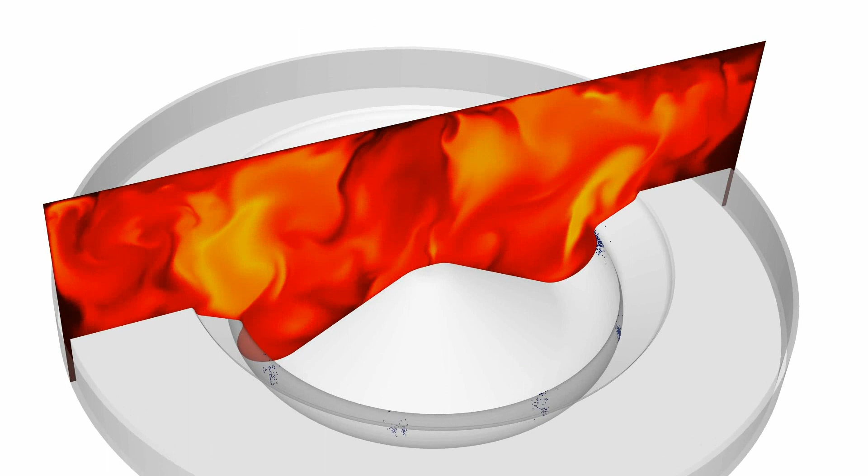The meshing capabilities of CONVERGE, which creates a mesh at runtime from a surface file, is particularly advantageous for optimization problems where the geometry is changing through optimization parameters. Recently, CONVERGE version 3.0 was released with significant enhancements over previous versions. Version 3 has cell-based load balancing and reduced RAM requirements to provide better capability on HPC clusters. The new version is more highly scalable, can better leverage fast interconnects, and can complete simulations with faster turnaround.

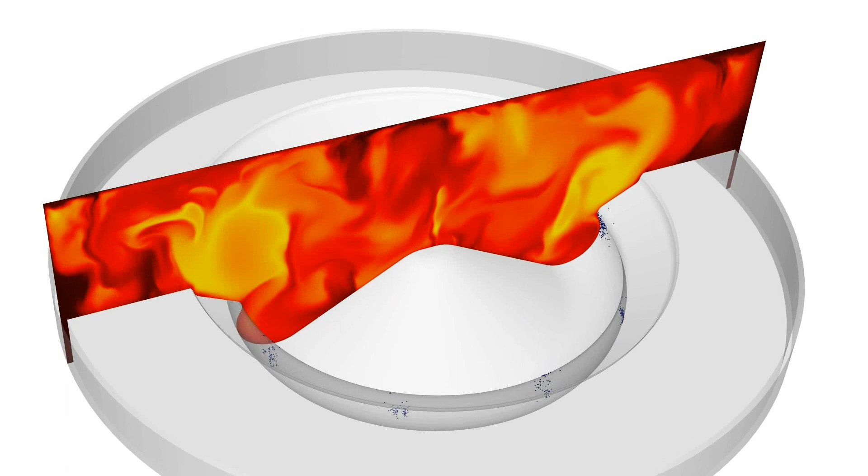is reduced significantly. For the single-cylinder high-speed diesel engine case, we were able to run 16.5 engine cycles in one day, and for the spark-ignited PFI engine case, we were able to run 12.5 engine cycles in one day. Both these cases are run on an HPC cluster with a fast InfiniBand interconnect. These engine cases were not tweaked to make the parallel results look good. These are real results for best practice engine setups.

These kind of turnaround times open the door to engine research applications that were prohibitively expensive in the past, such as knock or cycle-to-cycle variation, which require the simulation of many engine cycles, or optimization, which requires typically 1,000 or more engine simulations to identify a global optimum.

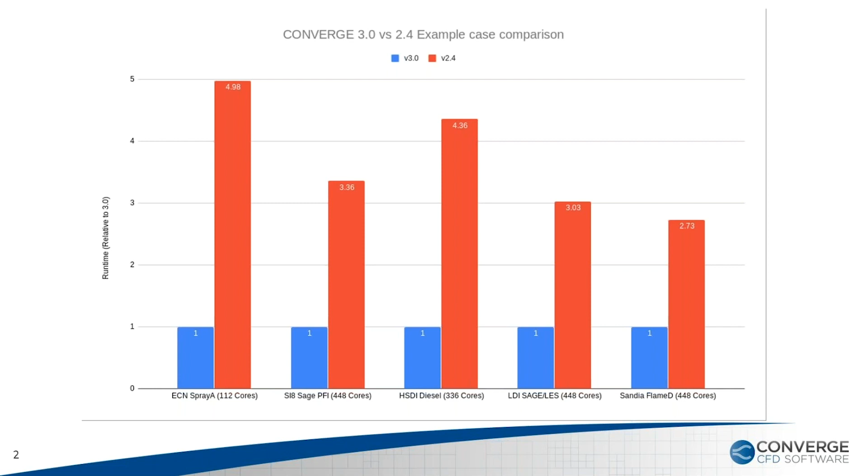Today's webinar will review recent work with geometry optimization with CONVERGE involving two partnerships with Friendship Systems and their CAESES software package and Aramco Research.

Thank you for this introduction, Dan. This is Mattia Brenner from Friendship Systems in Germany. And I would like to talk a little bit about our tool CAESES and how it can be used specifically for powertrain applications in connection with CONVERGE's CFD tools.

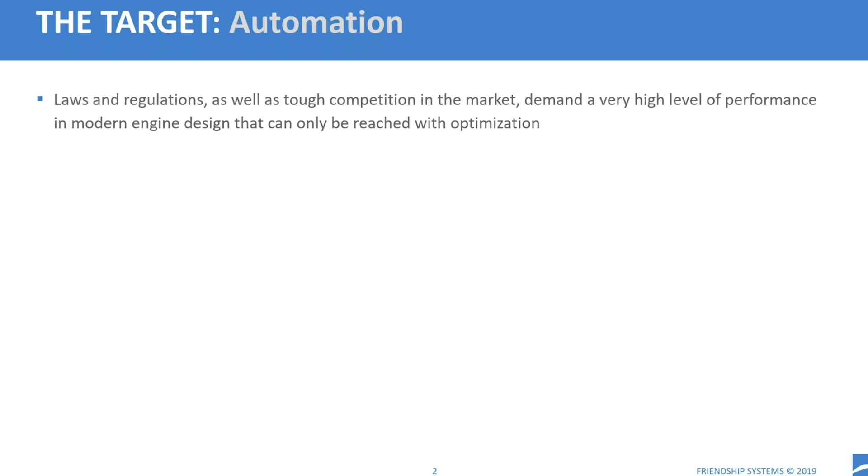So let me start by giving a little bit of context. So the target of what we want to achieve is automation, and the reason for this is that due to laws and regulation and competition in the market, the expectation for the performance of modern engines is very high, and typically this is not easy to attain with, let's say, traditional iterative manual processes, but these targets can only be reached with optimization. And these kind of automated processes, which are optimization or automated design exploration, they typically lead to better and optimized designs. They can, of course, reduce the development times or reduce the design cycles.

And also, which is a very important point in my view, they also increase the knowledge about how the product behaves very early in the design process. So it gives an understanding of how the product reacts to changes in different parameters and creates a basis for decision making later on in the process.

So if we want to run these kind of automated processes involving CFD, we need to involve several tools to run that. And first of all, we need a simulation tool that can provide the performance information that we would like to evaluate. This is done very nicely by CONVERGE. And we need a driver of the optimization process, so a tool that supplies all the algorithms and strategies that we need to run the different design parameter studies and explorations.

But also a large amount of data is created throughout that process, so the tool needs to manage all this data that we generate and also allow for some post-processing where we look into the actual data that we created and are able to make design decisions. And finally, the third component that is needed in this process is a suitable CAD tool that can produce all the different geometry variants that we want to analyze throughout this process. And basically the last 2 points are what we are trying to address with our tool CAESES.

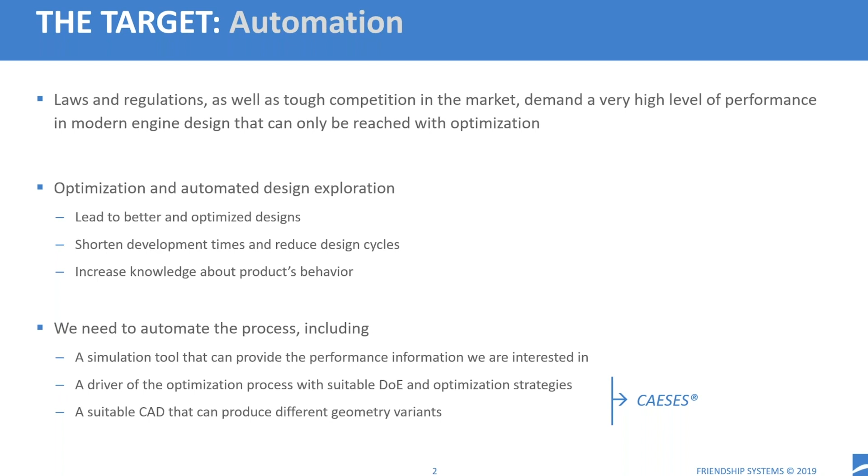So as you just heard, one part of CAESES is a CAD tool. So you might ask yourself the question, why would I need another CAD system? Typically every company already has some kind of CAD system in operation. And in our experience, the typical bottlenecks that people encounter when they're trying to set up and run such a design exploration or optimization process are actually related to how the geometry is handled and how the variation of this geometry is handled.

Traditional CAD systems, while they might be very powerful for many different things, often don't have a strong point on geometry variation. When you're trying to automatically create geometry variants, change geometry parameters in an automated fashion, this is often prone to failures, so the geometry might break down, cannot be regenerated, or might need some manual work. So that's of course a significant problem.

Another important point are constraints. Typically when we're trying to optimize the geometry, we have certain constraints to take into account due to manufacturing or packaging, for example. And that's also a point that's often not so easy to consider with traditional CAD systems throughout the optimization, to make sure that the optimized geometry that we get in the end fulfills these constraints.

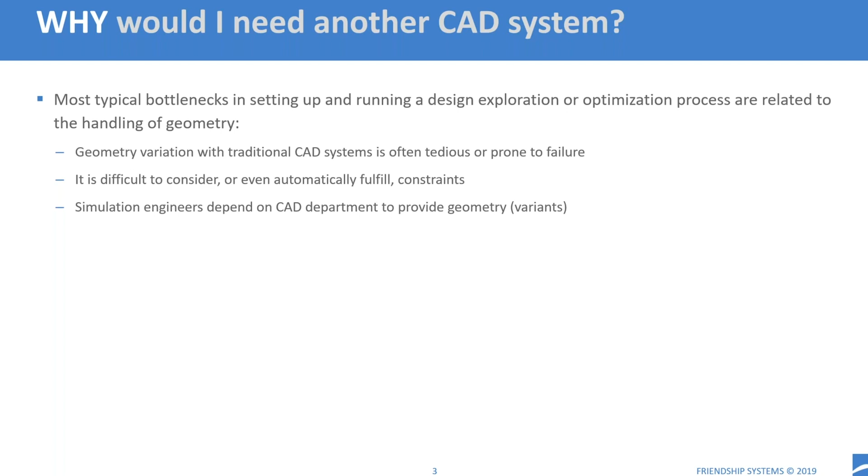Also, a bottleneck that is encountered, depending on the situation in the company, is that there is a division of labor between the simulation engineers and the CAD department, and the simulation engineers are typically dependent on the CAD department to provide the geometry models and to create geometry variants due to some change requests. And of course, that's not very suitable for automation.

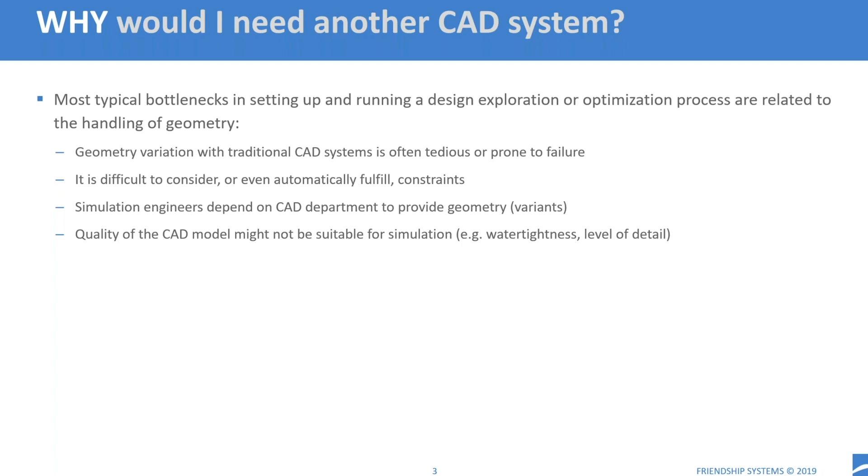And finally, last point, the quality of the CAD model might not be directly suitable for simulation, so it cannot be transferred to the simulation system or the meshing directly as it is. There might be some issues with water tightness or even the level of detail that we have in the model. And these are the kind of things that we're trying to address with our CAD functionality within CAESES.

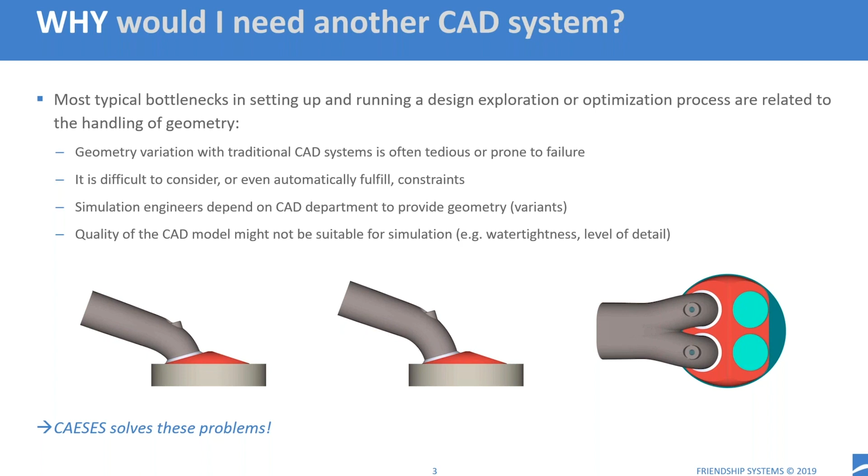So if we look a bit more closely at what we do: the strongest part of CAESES is the specialized CAD tool, which allows you to build up smart parametric models of the geometry, efficient parametric models that allow a lot of variation, a lot of flexibility, but without having too many parameters, because the more parameters we have, the more the effort for the optimization scales. And it is also very robust to run these variations.

The second component included within CAESES is the automation of external simulation. This is basically where we have the interface to CONVERGE, where we can transfer the geometry and other inputs from our system to CONVERGE and collect results. And the final component is the optimization environment that provides the algorithms, the data management, and post-processing that I mentioned before to really run all this process in an automated way.

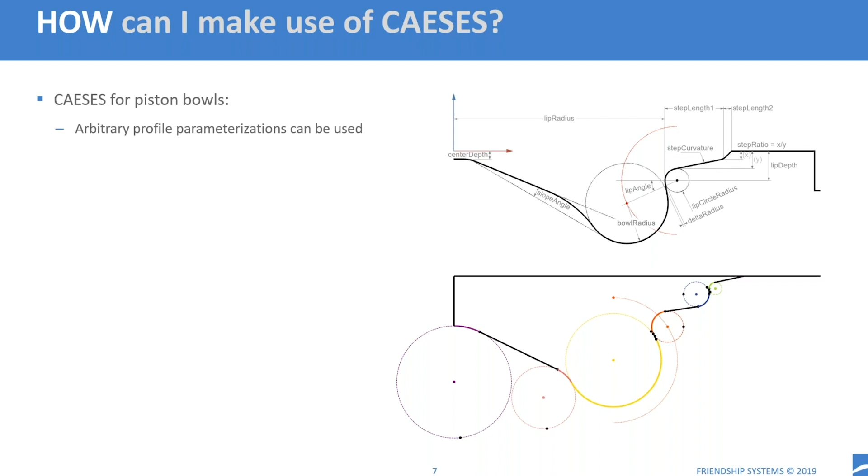So now let's come to how you can make use of CAESES specifically for powertrain applications. I want to start with what is at the moment probably the most popular application for CAESES in this field, which is piston bowl design. The capabilities of CAESES for piston bowl design are that arbitrary bowl profile parametrizations can be used. There are no prepared templates; everything is user defined, and you can come up with your own parameterization using the parameters that you want, giving you all the control that is needed. You can see some examples here on the right side.

The second point, which I mentioned already, and which is a crucial point in our process, is that we allow robust variation of the geometry with mostly no failed variants, or at least very, very few failed variants. You can see some variation of the geometry here on the side.

In the context of piston bowls, an important constraint is the compression ratio. Typically, when we're changing the geometry of the piston bowl, we would like to keep the compression ratio at a fixed value. This can be involved in the parametrization, so that you can change the parameters that you would like to change and keep the compression ratio always fixed to exactly the value that is needed.

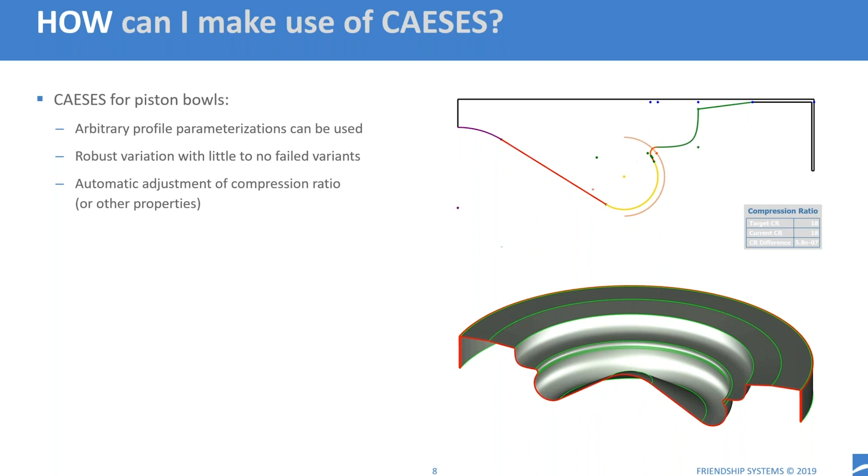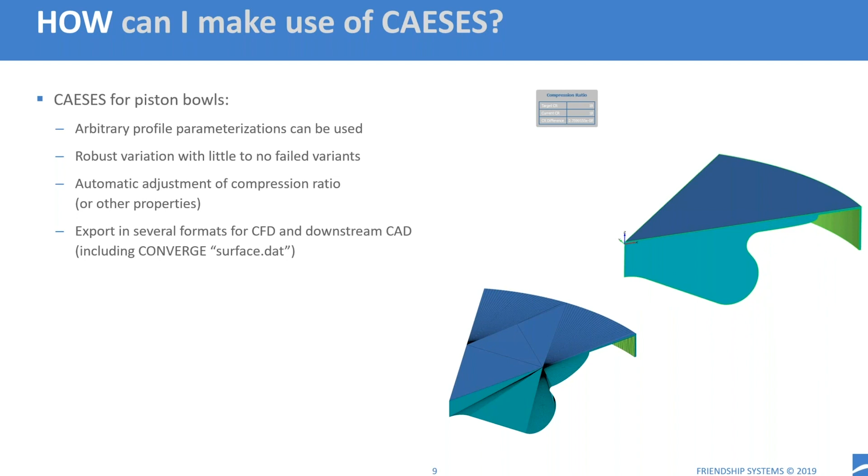Finally, when the geometry model is ready and can be varied, it needs to be exported for the simulation, and we support export in several different formats that are suited for the downstream CFD process or downstream CAD. In the context of CONVERGE, we support the native surface format that CONVERGE uses, where you can also identify different areas of the geometry with different IDs, so that they can get the appropriate boundary conditions, mesh settings and things like that.

So now we've talked a lot about geometry, but through the interface where we connect CAESES to CONVERGE, we have complete access to the CONVERGE input files, and every value that is included in these input files can also be parametrized, so that the geometry variations and the investigations on this piston bowl geometry can be combined with other parametric studies on injection parameters, for example, or other simulation parameters that should be changed.

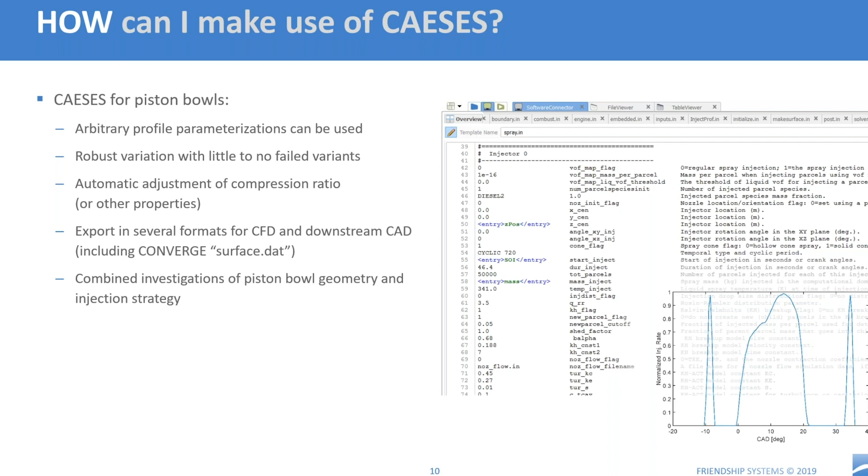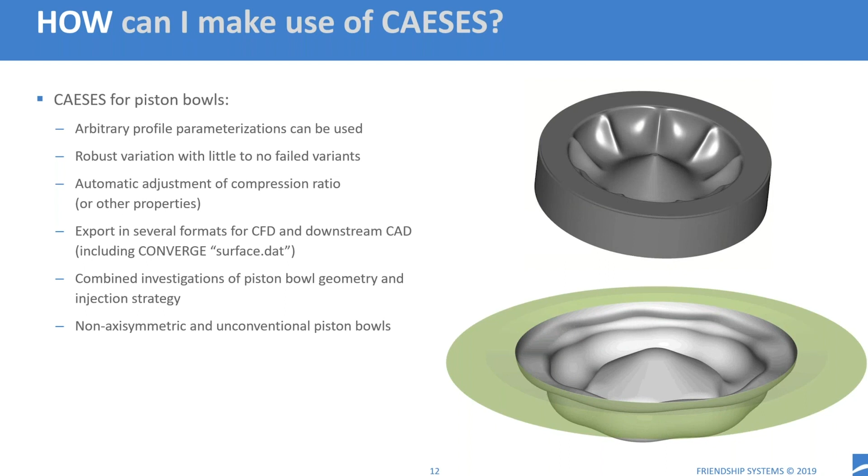So a second application that I would like to focus on today is intake port design, which is probably equally important as piston bowl design for the different types of engines. Of course, here you can also parameterize arbitrary types of intake ports. You see some examples on the side. And again, crucial importance is on the robust variation with no or little failed variants.

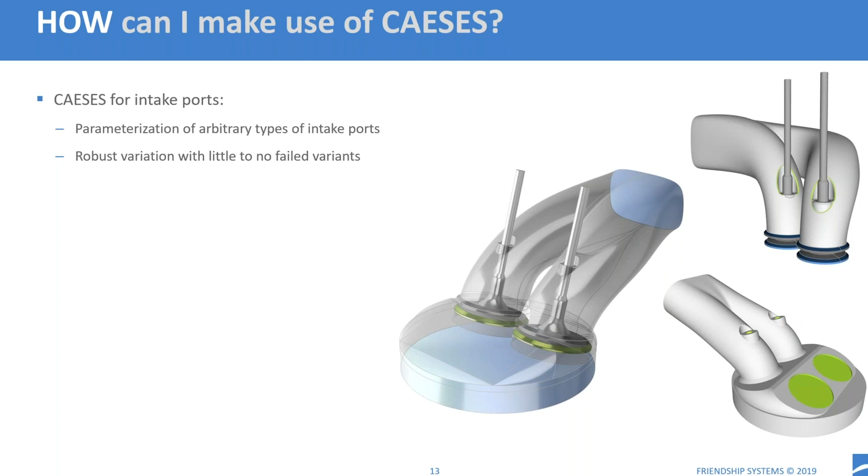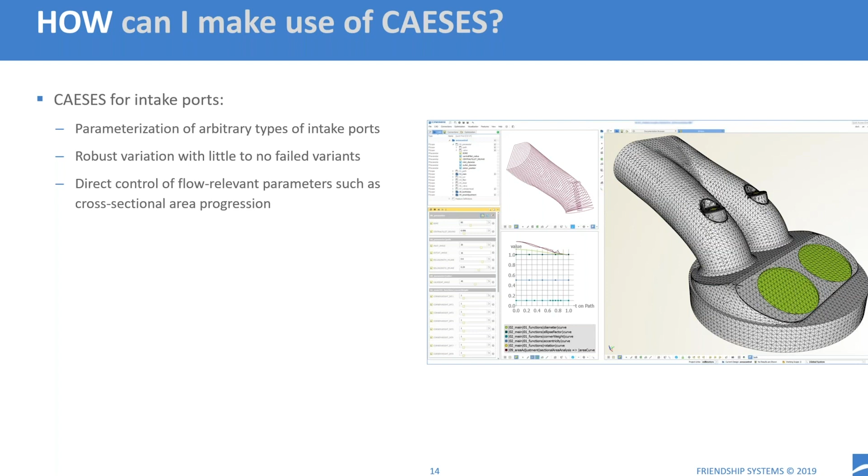It's also possible to consider constraints, for example, for manufacturing. Here we have an example for drafting angles. So typically, due to the casting requirements, we need to have some drafting angles at the side of the port, and these can be built directly into the model and also be taken into account during the variation of the geometry.

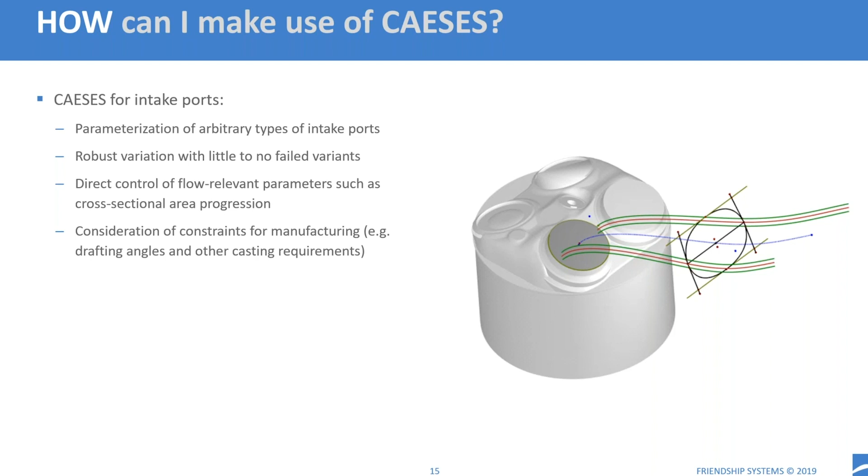An alternative to the parametrization that I talked about just now is morphing. So we also have the possibility to import existing geometries into CAESES and change these geometries using different morphing methods that are available. You can see here on the side a video of one of our morphing tools that allow for a very easy interactive definition of the shape changes. And this is basically a quicker approach than a full parametrization of the geometry, because it very quickly allows you to define some changes to geometry. The downside is that it gives a little bit less direct control on the geometry, and it's less flexible than a full parametric approach.

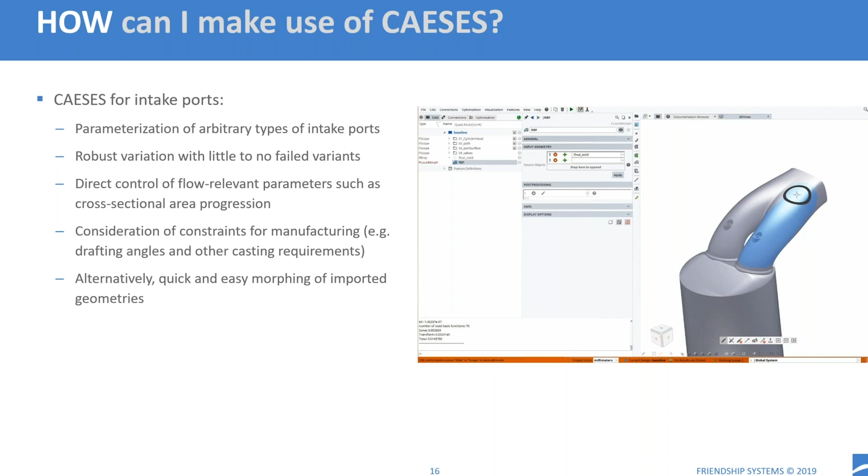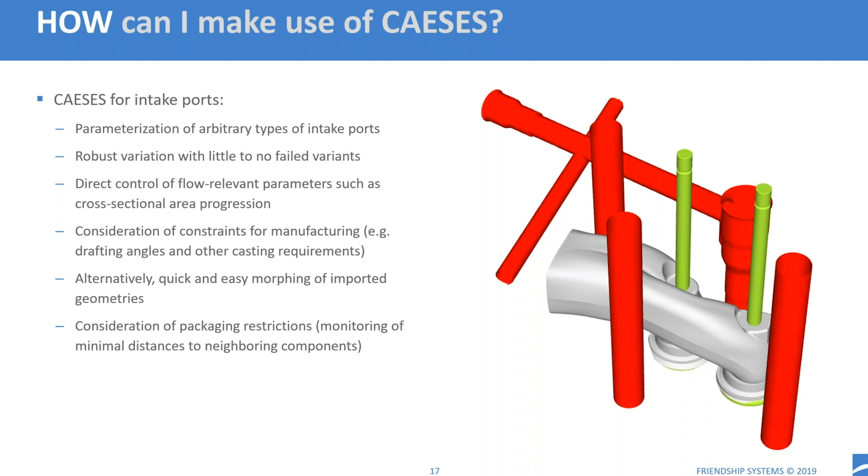So another important thing here for these port geometries, due to the cramped space in the cylinder head, are packaging restrictions. So here there is a possibility to monitor the distance of the port geometry that we're changing to neighboring components. So if you have your injector and bolting holes and oil gallery and things like that imported into CAESES, you can check all the distances to these components all the time while the geometry is changing, and make sure that minimum distances are not undercut, or that there are no collisions between these components.

And finally, similarly as for the piston bowl, the geometry in the end can be exported in a CFD-ready format, which includes the definition of different patches of the geometry that are included in the export format and that are available to be addressed in the downstream process.

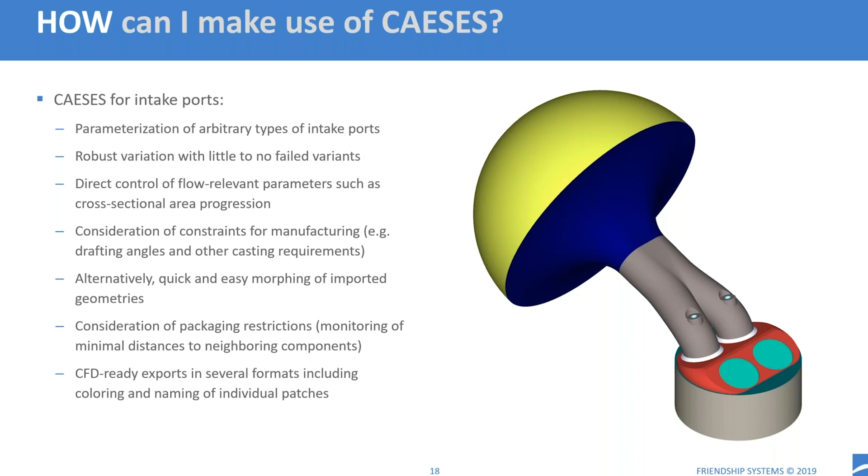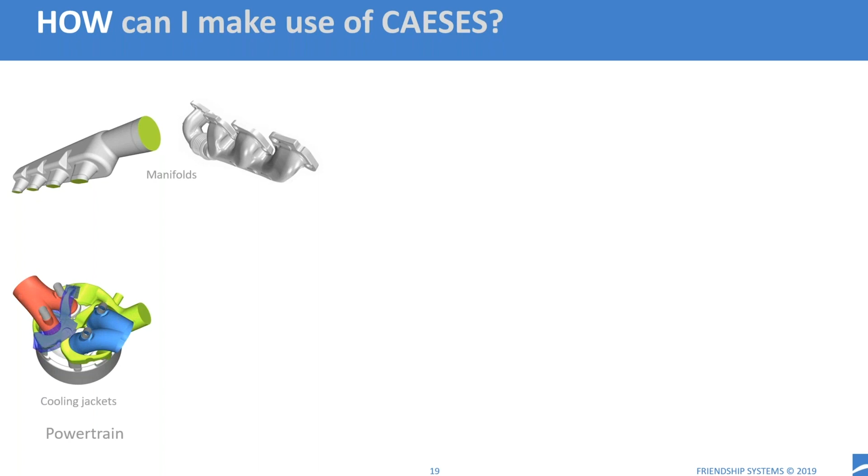So these are two applications that I wanted to focus on in more detail. Of course, CAESES can also be used for other applications in the powertrain field, for example, exhaust manifolds, intake manifolds, and can also be used for cooling jackets. Here, typically, morphing methods are used to adjust the shape of the cooling channels. It can also be used for electric powertrain. Here, also, cooling is typically an issue that is addressed with optimization, or for details such as injector design.

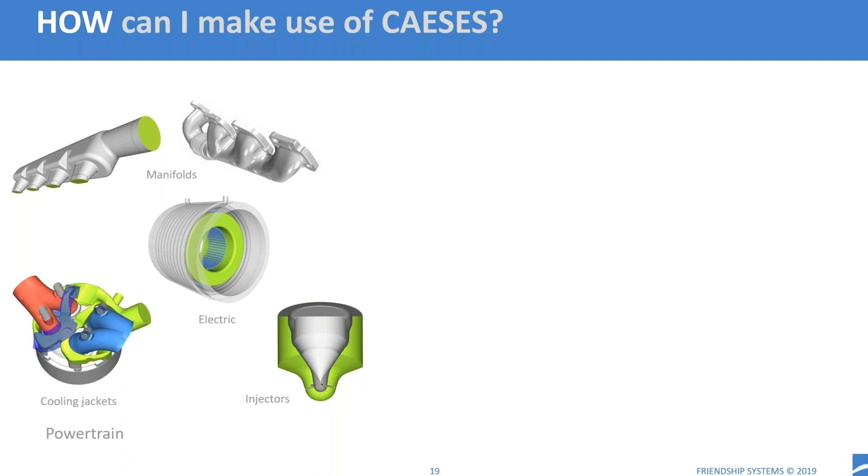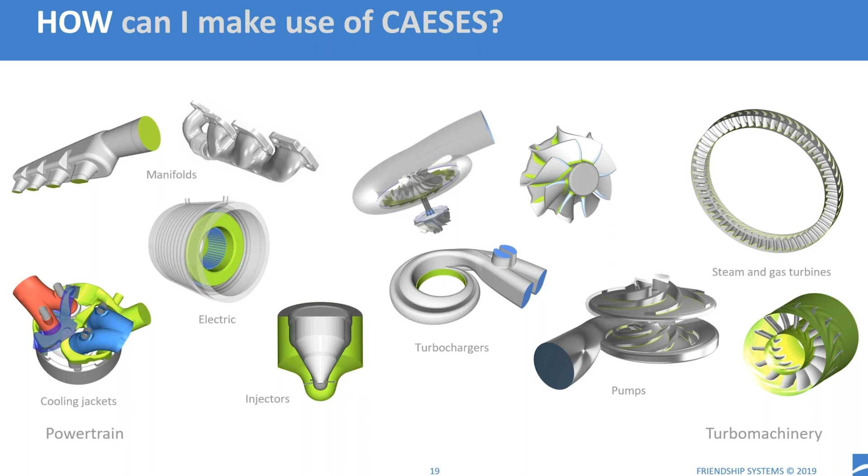And if we move a bit further away from the engine itself, turbochargers are also a very good and popular application for our tool, and that, so to say, gives also the transition to other different applications in turbomachinery, such as pumps and gas turbines and steam turbines. Yes, so much for an introduction about our tool and the applications of our tool from my side.

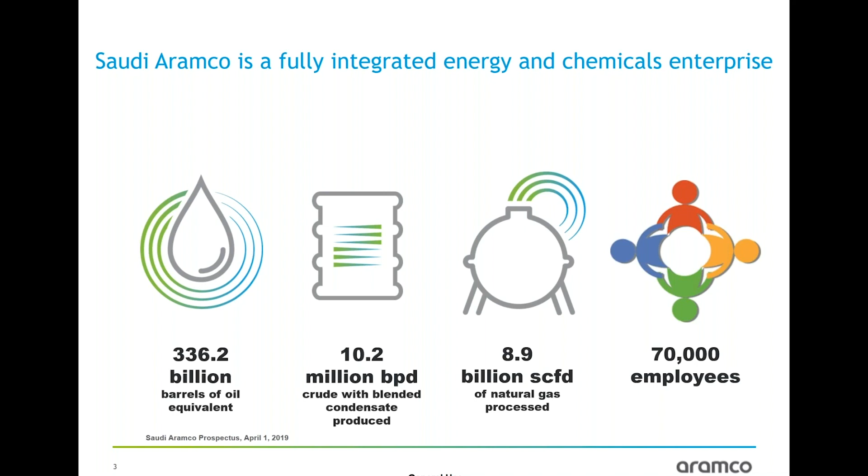So first, a couple of slides on our introduction of the company. Basically, our company is a fully integrated energy and chemicals company. We are the largest oil exporter in the world. We also have huge reserves of natural gas as well. Over the past several years, we have been significantly expanding our refinery business. Overall, worldwide, we have more than 70,000 employees from more than 90 nationalities. So it's a very diversified environment.

Over almost the past 10 years, we have been expanding our research footprint over the world. In the US in particular, we have 3 research centers, one in Houston, one in Boston, one in Detroit. I'm located in Detroit. Our Detroit center mainly focuses on transportation technology.

A little bit more information about Detroit. We have a few research areas. One is strategic transportation analysis. The second one is passenger transport, and the third one is commercial transport. Passenger transport and commercial transport mainly focus on innovative fuel and engine technologies. We also have vehicle technology integration. Basically, we're not going to just look at the engine part, right? We want to put an engine in the vehicle to really demonstrate the performance. The CFD part is mainly for following the passenger transport and commercial transport areas. We're basically supporting different new engine concept development.

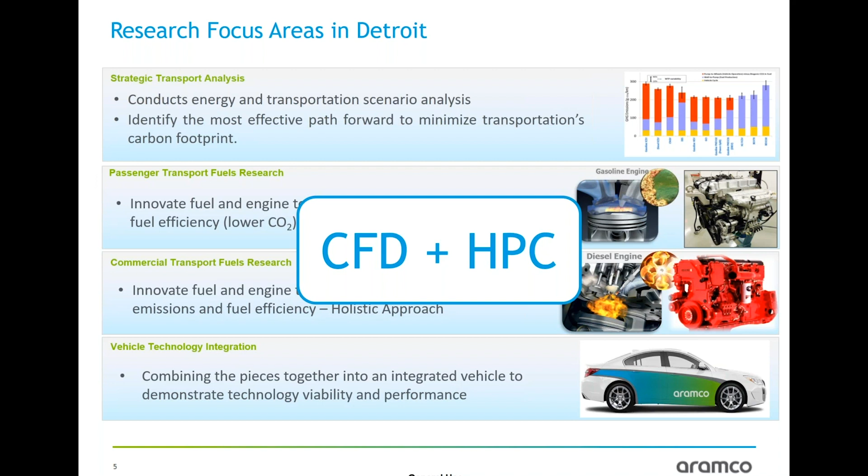A little bit more details. For the Detroit Research Center, we have 5 state-of-the-art engine test cells, fully automated, and we also have one 4-wheel climate chassis dyno to do vehicle testing. We also have our own controller, which is really important for us to explore different new engine concepts and really control them to support the new concept. And we also have excellent computing capability as well.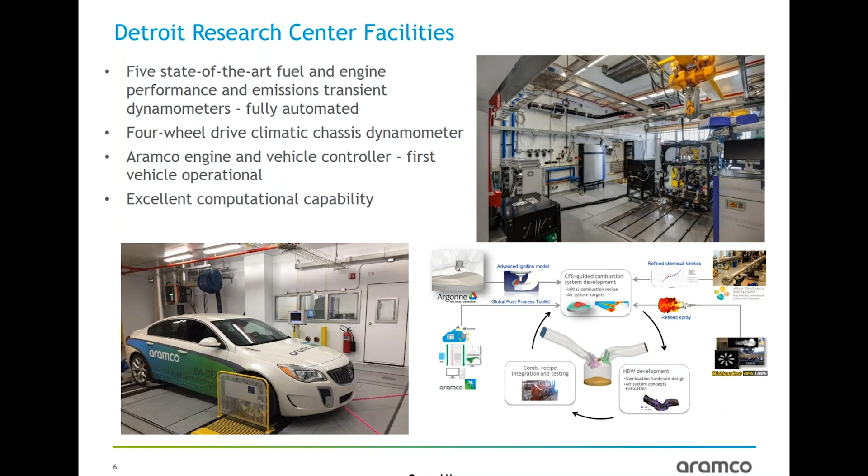So now to come to the real project. Here we are using one example project to demonstrate how we use these capabilities to support our engine combustion system development. Basically, this is a heavy-duty gasoline compression ignition project. I'm going to give a little bit of background information on why we're doing this, what's the motivation behind this.

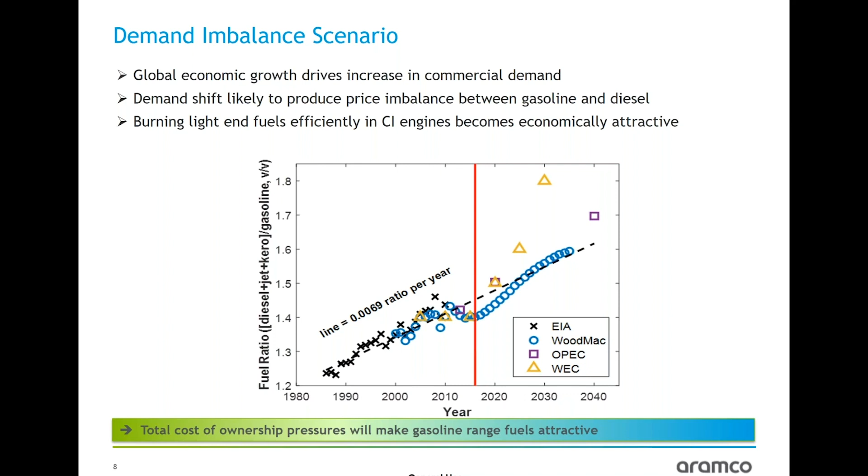If you look at this figure, it basically shows the fuel ratio of middle distillate to light fuel such as gasoline. You can see from different sources, by 2040, this ratio of diesel to gasoline could reach as high as 1.8, right? So this is a huge demand imbalance. This demand shift will likely produce a price imbalance between gasoline and diesel. So finding ways to effectively burn these lighter fuels in compression ignition becomes very attractive. So this is one motivation for looking at this concept.

On the other side is the regulatory requirement, right? This basically represents the timeline of the CARB regulatory requirements, looking 10 years down the line. You can see the NOx emission is going to be lower and lower, right? It's not final yet, but down the road, maybe 2027, 2028, the NOx could reach a very low level, like 0.027 grams per kilowatt hour.

This very low criteria pollutant emission requires a new engine concept to meet this requirement, right? The GCI concept basically offers a better NOx-soot trade-off, a potential pathway to meet this requirement at a relatively lower cost.

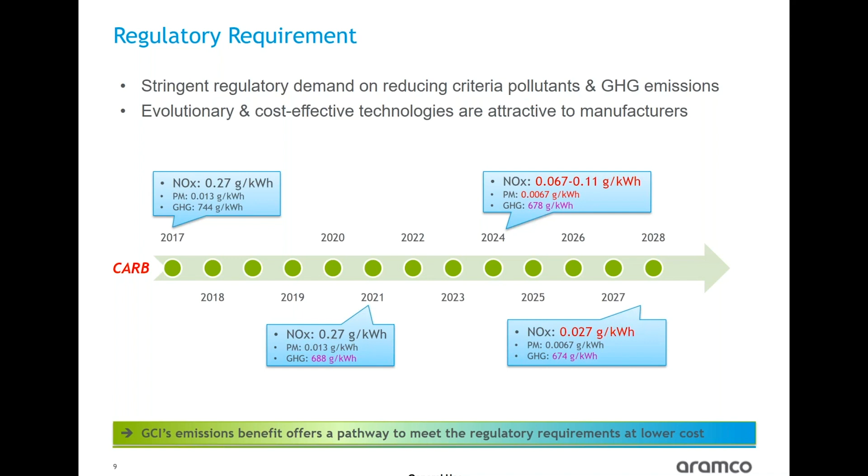The test engine we have is a modern heavy-duty engine. It's very popular on US freeways. It's a 15-liter, 6-cylinder, very efficient. The brake thermal efficiency is around 44%. So it's a really popular engine and also really well optimized, and any improvement on it is really challenging. Here we use this test engine to compare different combustion concepts and see the potential of this engine using different fuels.

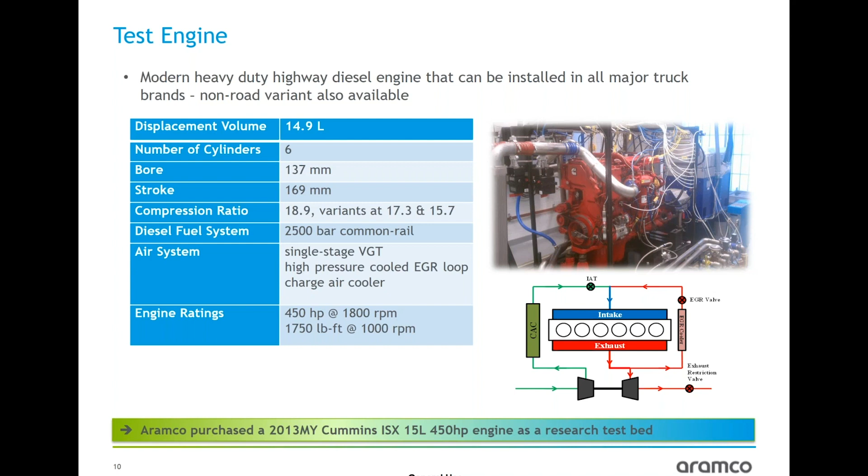For the fuel side, we look at several different fuels, right? We look at diesel fuel, that's the fuel for this engine. We also look at different gasoline fuels, basically 60, 70, 80, all the way to market gasoline. Our strategy is that we first look at 60. Chemically, it's very similar to diesel. The cetane number is 34, close to diesel at 41. Physically, it's very different, similar to gasoline actually. We then look at other gasolines as well to see what's the potential of different fuels combined with the engine.

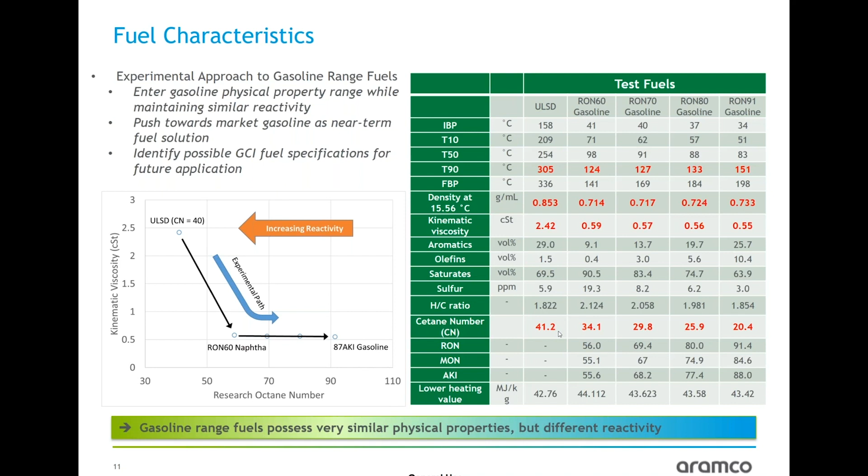So we use an analysis-led design process. Basically, we start from CFD to give us some initial combustion recipe and air system targets. Then we go into the hardware development phase, basically do the optimization, the design, do the fabrication, and finally in the test cell we do the integration testing.

Then based on testing results, we compare to the feedback from the first CFD part, then we can examine which part we're doing well, and which part still needs improvement. This is an iterative process.

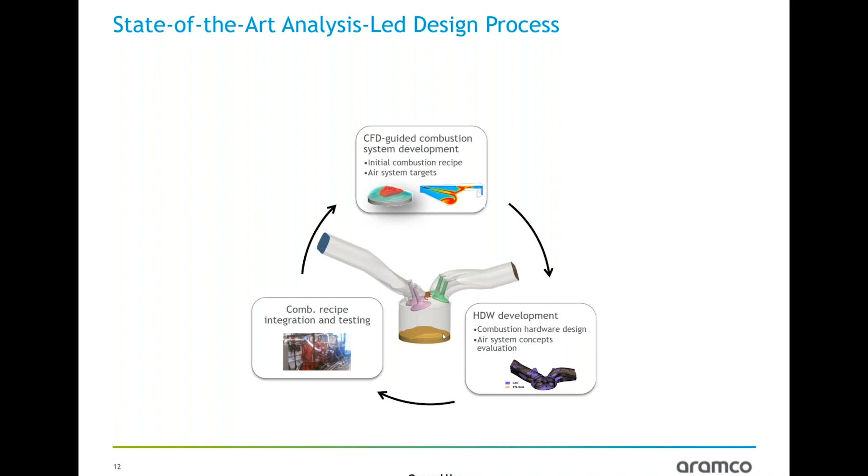So in this process, we also work closely with our collaborators. For example, for the chemical kinetics part, we work closely with KAUST. They have really good expertise in this area, which we use to refine our chemical kinetic part. We also work with Michigan Tech, using their constant volume chamber to help us provide high quality spray experiment data, including both diesel spray and GDI spray.

And then we use the spray data to improve our spray models, and also work extensively with Argonne National Lab on different topics, including in-nozzle flow, engine design, machine learning, ignition, and various other topics, working closely with our collaborators at Argonne to improve our sub-models.

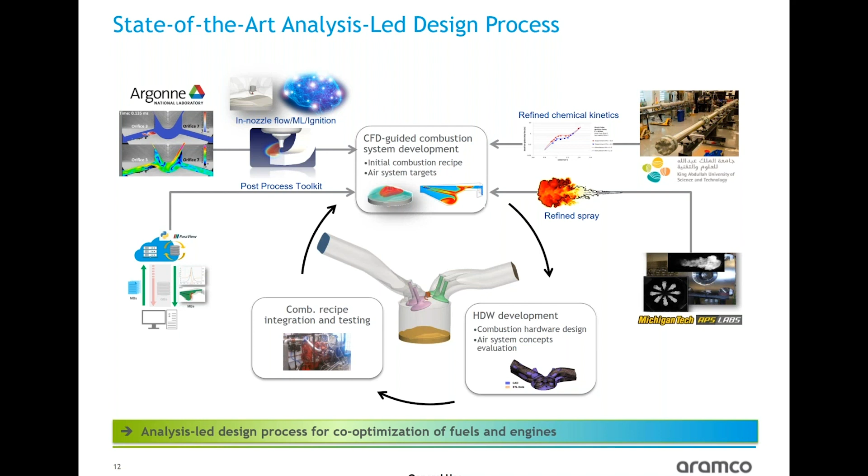Then we also have our post-process toolkit in-house to improve our productivity and efficiently support different projects. So we use this analysis-led design process for co-optimization of fuel and engine to achieve robust full load range operations. Here's something very specific for the combustion system part, how we do this flow process.

Then after we got all the design combinations, basically in a CFD profile, a CFD file, right, with all different designs, maybe like 100,000, at different operating conditions. It's very important we optimize the concept at different operating conditions, considering different scenarios.

Then we use the Mira supercomputer at Argonne extensively. Mira is a supercomputer, it's very gigantic. It basically has almost 800,000 CPU cores, and although per-core efficiency is slower than a typical cluster, it basically has unlimited cores. You can run all these simulations at the same time, which can significantly reduce the time to design.

Also, it's not a trivial job, you can't just run the simulation there. It actually needs years of research to make the code, especially for CONVERGE, scalable, with optimization or utilization of the I/O and memory. Lots of work - Argonne and CoST have done significant work here to make the code scalable and perform well, robustly, on the supercomputer.

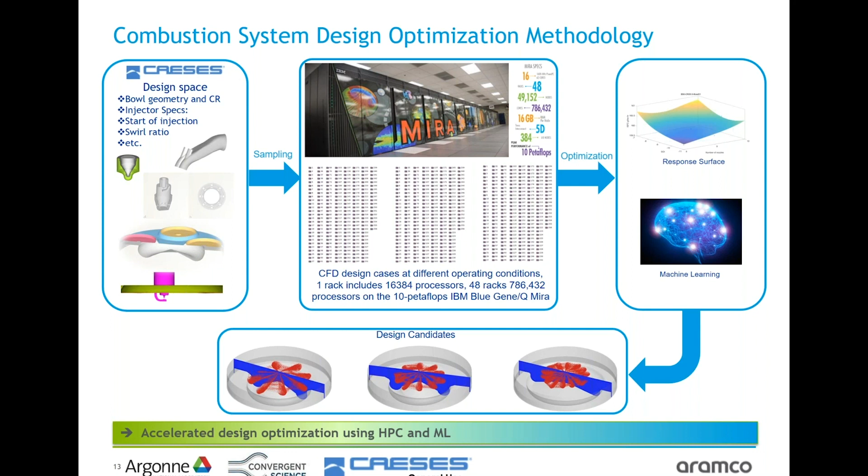So finally, we got the design candidates, delivered for fabrication, then finally put in the test cell for integration and testing. This is one example where we follow the process - this is for a heavy-duty GCI project.

First step, very important, we need to have a solid validation. You can see here at different operating conditions, different compression ratios, for pressure curve and emissions, we have a pretty solid validation for different operating conditions. Then that gives us confidence to move to the design optimization.

Then following the process, that's the fuel consumption improvement we got from the simulation, up to 4.1% ISFC improvement at one operating condition. This bar chart basically shows the improvement from different design parameters.

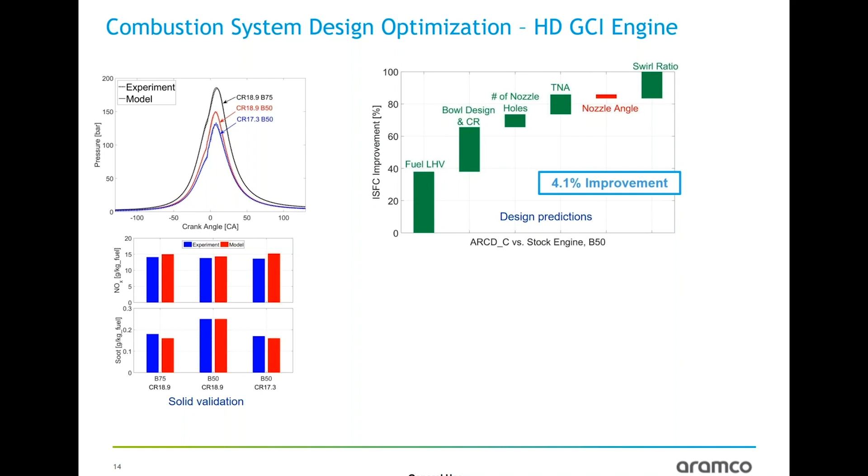Then finally, we got all the hardware and put it in the engine for testing. So this is basically what we got - up to 4.2% BSFC improvement from the experiments. It's really encouraging results.

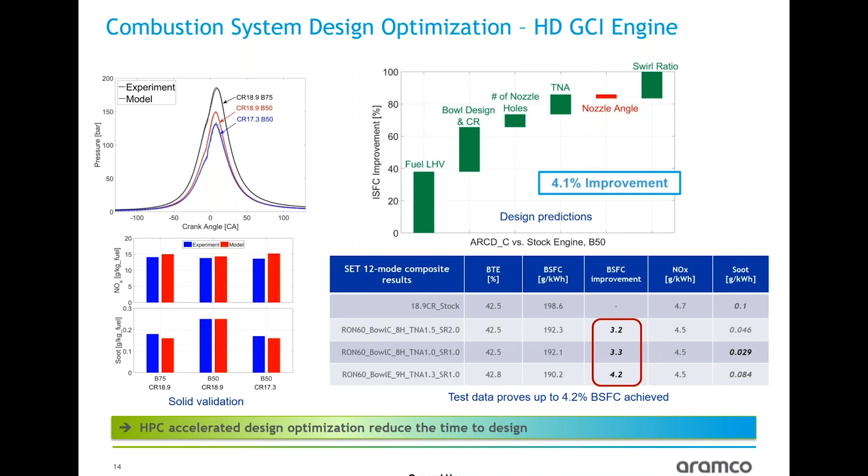Right now, we are working on seeing which part we're doing well and which part still needs improvement. At least the bottom line is we got a really encouraging result - this kind of HPC-based design optimization method really reduces the time to design and delivers really encouraging results.

So we also use machine learning to help us further reduce the time to design. There are a couple of methods here. One is a machine learning genetic algorithm method. You can see from this plot it's a very complicated surface, so you want to use machine learning to do this kind of data mining. For this first example, the plot at the bottom shows 9 different design parameters using a traditional CFD-GA method compared to this newly proposed machine learning method. You can see it's pretty good results compared to the traditional method, with a much shorter, significantly reduced time to design using the supercomputer, while still achieving really good results.

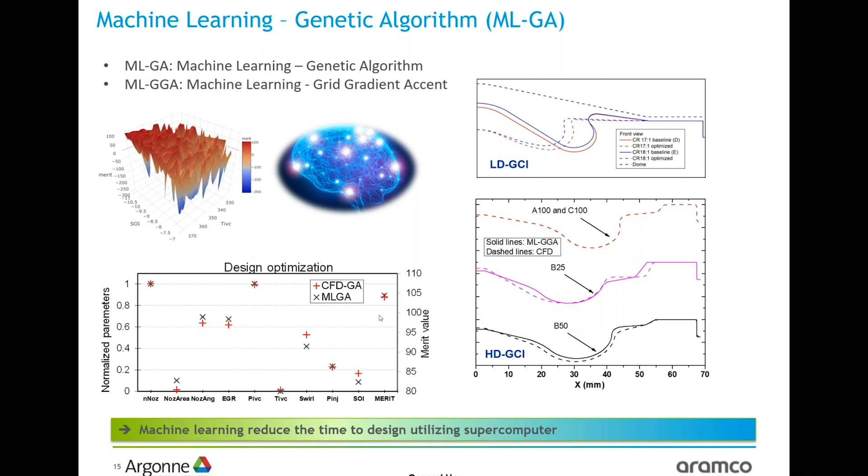Okay, I think that's it from my end. So now I would like to take over again.

I'd like to quickly run you through a process of how CAESES is used for specific applications. Beforehand, I gave a general introduction about the capabilities, and now I'd like to show how it actually looks when working on a specific project with CAESES. The example I have here is about the port optimization project.

The case we have here is an asymmetric intake port for a diesel engine, and we're running it as a flow bench case. So we have a cold flow, no moving piston, but the flow comes in through the intake port and goes out the bottom of the elongated cylinder, and the swirl is measured there. This is one of the objectives we're trying to optimize. We've also been looking at the so-called port permeability or discharge coefficient - basically the amount of flow that goes through the port.

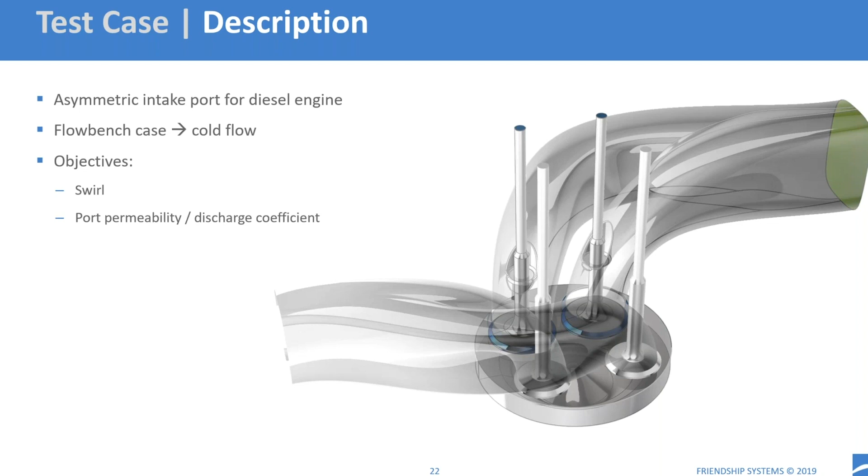I'd like to start with the modeling process. If we want to work on such a case, the first step is to build the parametric model to be used in the optimization, with all the parameters we want to access and all the freedom of variation we need during optimization. Here we'd like to model the port geometry, and we start by defining the paths of the two channels in the port. This is the first path we've designed. To give more detail, this is designed using two 2D curves - basically the projection of the path onto two of the principal planes. We parameterize these projections and then combine them into a 3D curve that becomes the actual path. Then we do the same for the second channel of this port.

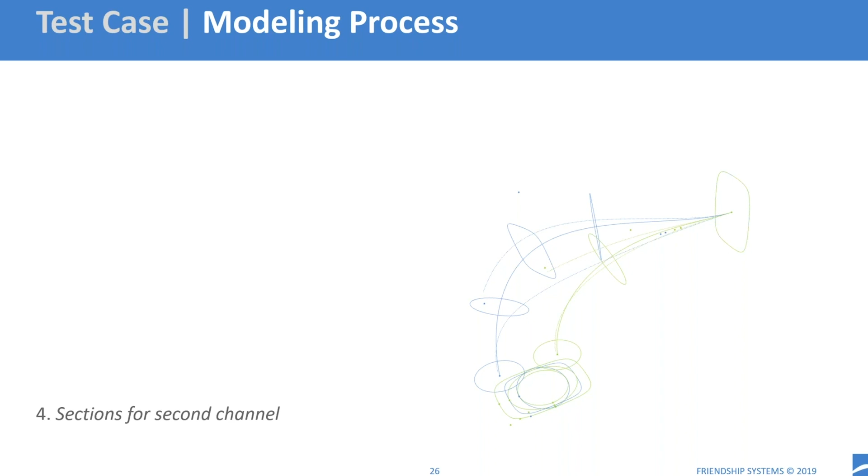Then we can place sections along this channel, and we have different methods of modeling such surfaces in CAESES. One option is to have a parameterized cross-section that is swept along the path or in a certain direction, and during the sweep you control the parameter values with a function that describes how the parameter value looks at each position along the path. In this case we've used a slightly different approach using discrete cross-sections, because it's more efficient for this port geometry. We've created cross-sections here for the first channel, as well as a smaller amount for the second channel. Then we're able to use another type of surface generation to go through these sections - it's a bit like lofting, but with additional control, especially because we want to control the tangency of the channels at the inlet and outlet. Using this special lofting technique, we create this channel and the second one as well.

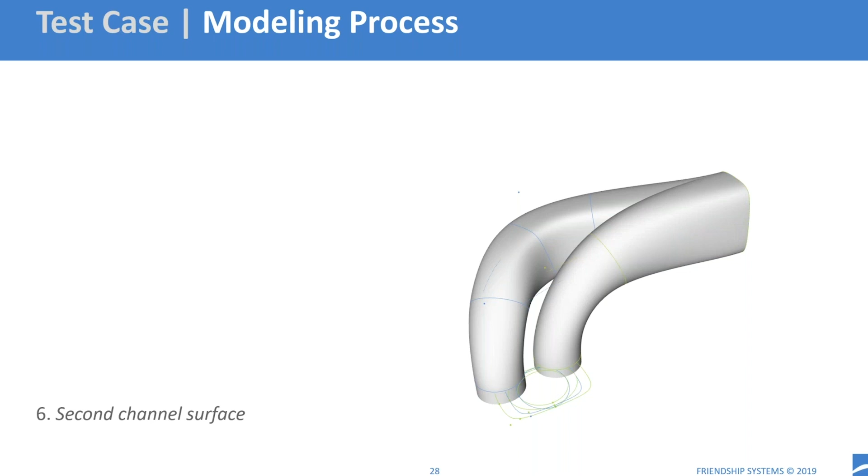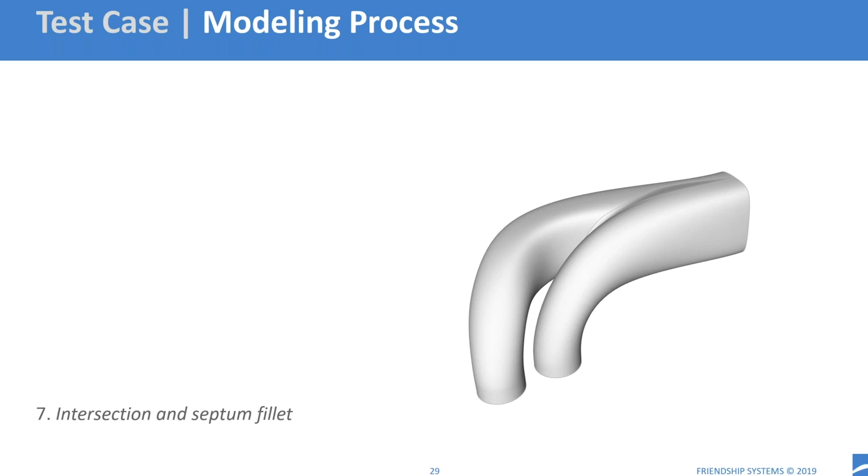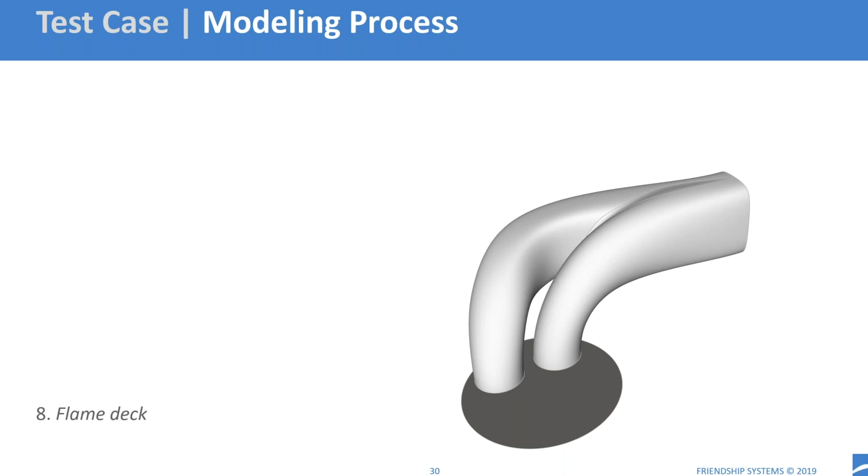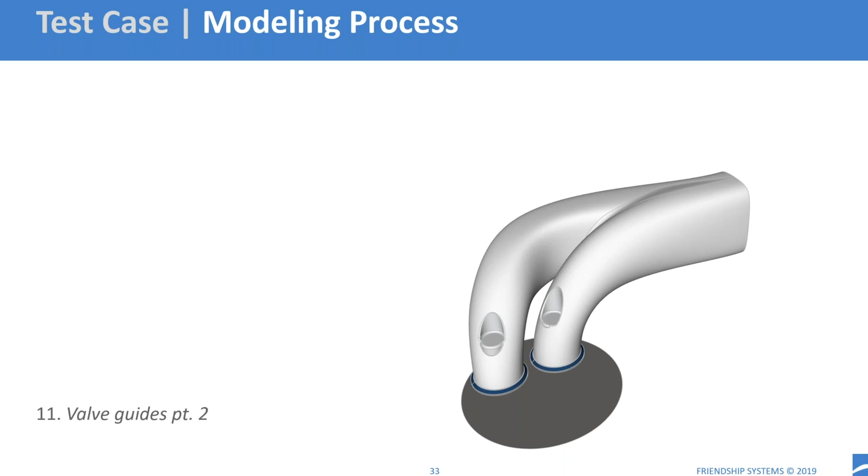When we have the two channels, we can intersect them and create the fillet at the intersection, this septum between the two channels. The next step is to add the different other components we need for the simulation - the flame deck here and the valve seats, and then the valve guides or bosses, which are intersected or attached to the port channels.

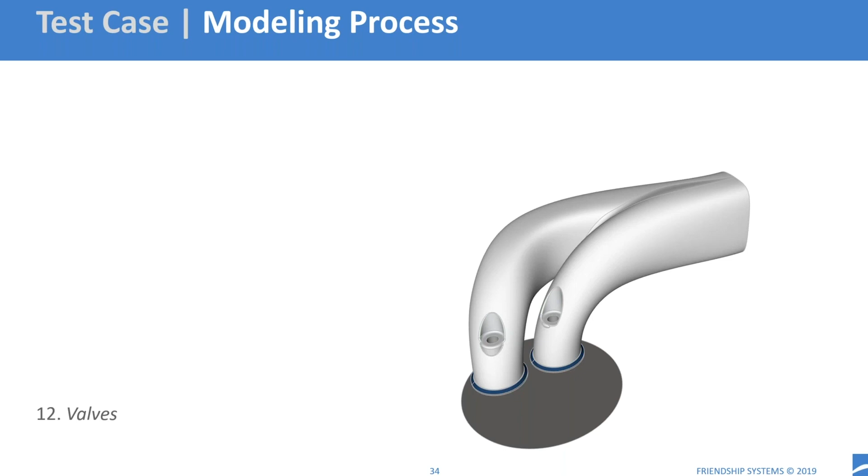And then finally, we combine this with the valves. You cannot see the valve geometries now in this picture, but you can see the cutout of the valve stem in the bossing. And finally, we add some additional components that we need for our CFD domain to run the computation. So we have this hemisphere at the intake inlet of the port to give the right flow distribution, and then we have the extension along the cylinder liner.

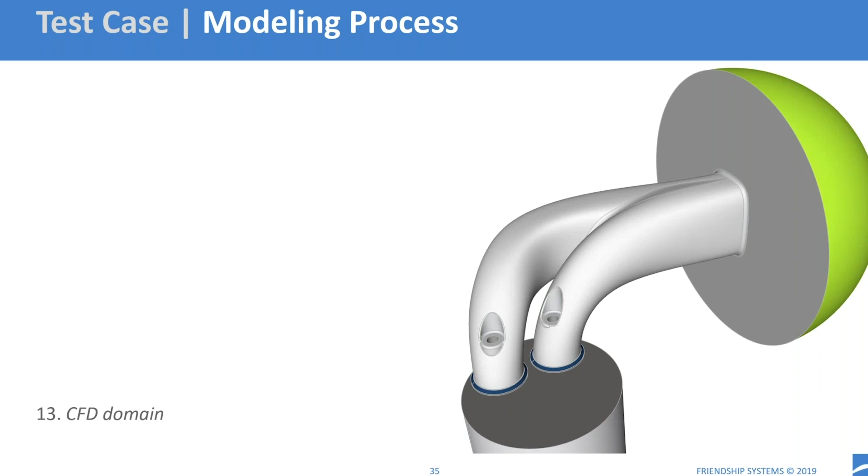So now I would like to just look at a few selected parameters of this geometry. Of course, the whole geometry model might have a number of parameters, which might be 20, 30, something like that. And I selected just a few to visualize how the geometry changes.

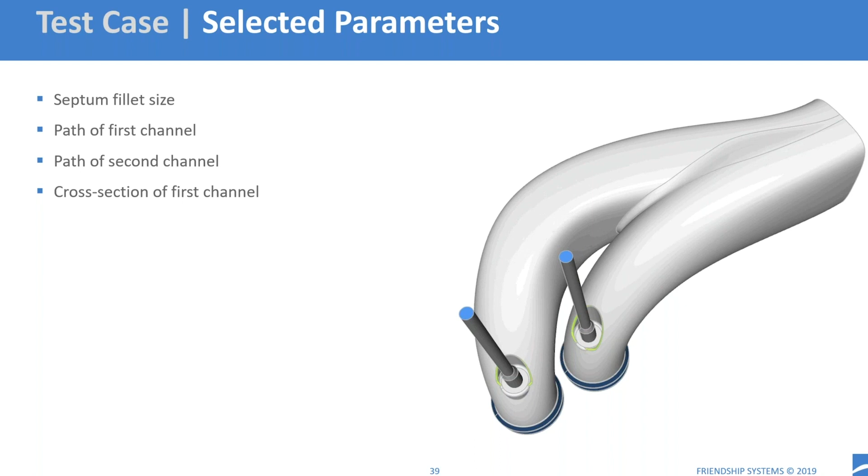And then we have here a parameter which acts on the cross-section of the first channel. So basically, this parameter here is making it larger and smaller. And the same thing for the second channel. This just to give you an idea of some of the individual parameters.

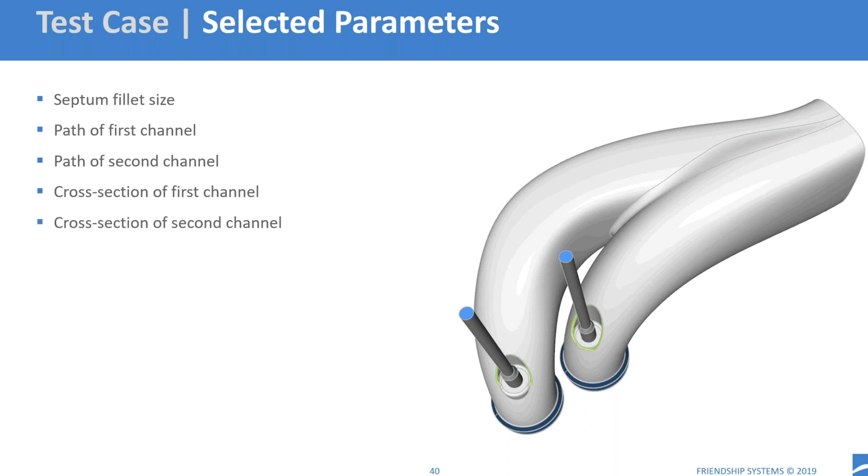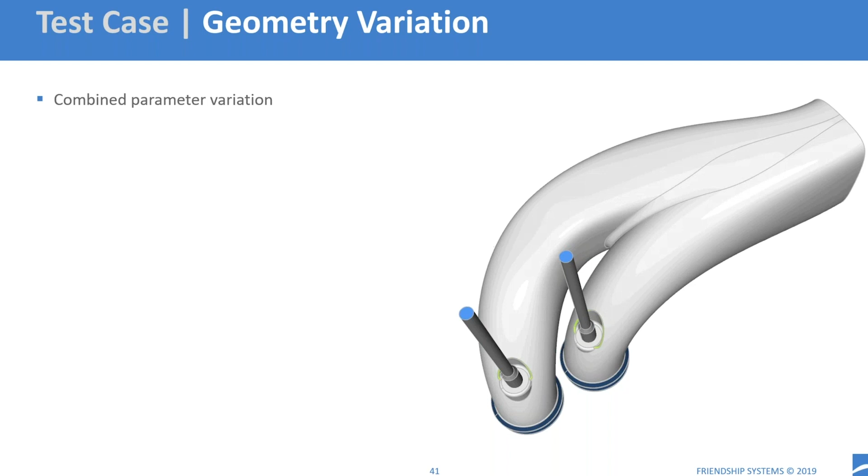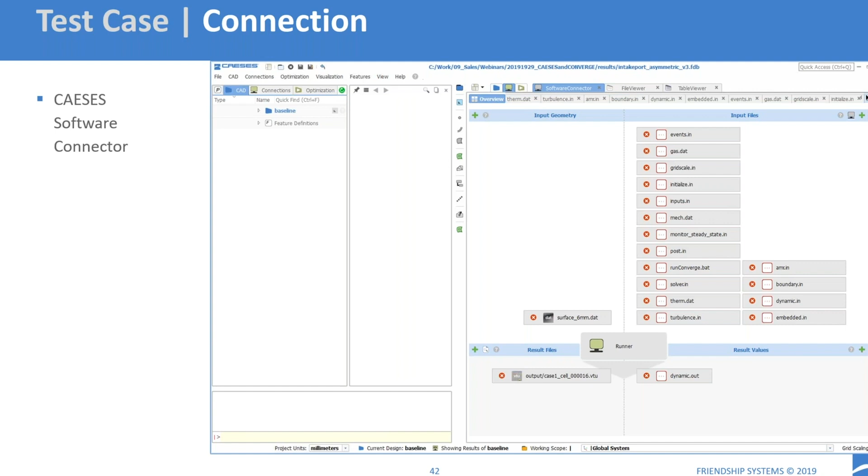So now we have the geometry model ready and the variability or variation of the geometry model ready. And the next step is to connect CAESES to our simulation tool, to CONVERGE. This is done with the so-called software connector in CAESES, which is basically a generic interface where you can define all the data exchange between CAESES and the external program.

So here in the first quadrant of this connector, we define the geometry export and the format that we want to use for this export. You see here the picture of the final geometry we're exporting for this flow bench case, and that's exported as a so-called surface dat file for CONVERGE. The coloring that you can see here in the geometry is also related to the different IDs that we have assigned to the different patches of the geometry.

And in the second quadrant here for the input to the external tool, we have all the additional input files that are needed, script files, simulation files, previous solutions, everything else apart from the geometry that you want to transfer to the solver. And here we have all the typical input files for CONVERGE.

And in the bottom half of the software connector, we define all the results that we want to read back into CAESES when the computation is finished. And in the third quadrant there, we have the result files that are read into CAESES as a complete file. So this could be screenshots, for example, that are created externally as a simple case, but you can also import complete flow field data, tabular data, other things.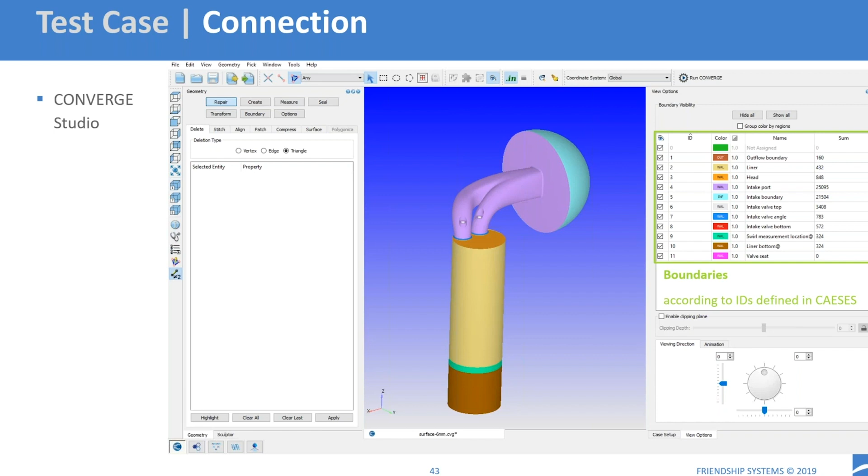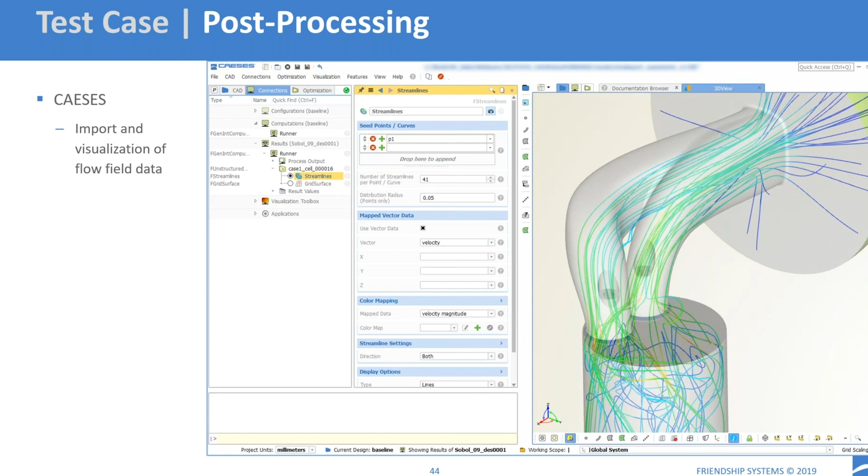So then you have your case set up and you can run the computation. The next step is post-processing. As shown in the software connector, we can read result files into CAESES, which can be used to extract individual values, but we can also import the complete flow field data and create post-processing visualization images within CAESES directly.

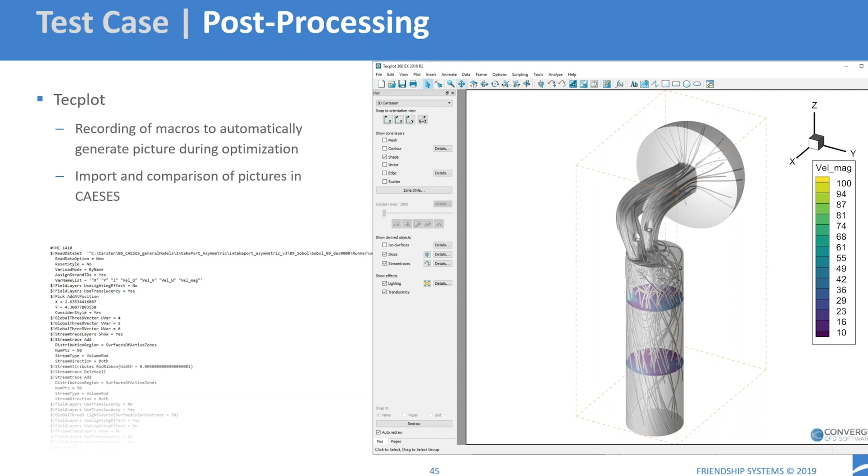That's one option, for example, with some streamlines. The other option is that you can also involve Tecplot in the process. You can record a post-processing macro in Tecplot and use that macro within the optimization process to automatically generate pictures for all the variants created during the optimization. Then we can read these pictures in as a result through the software connector into CAESES.

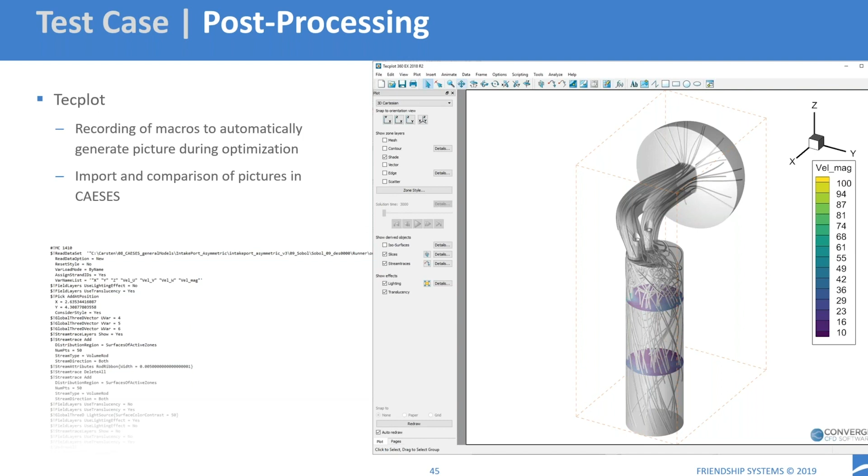In CAESES, when we're finished with our optimization run, we can look at all the results that have been created. There is, for example, a table view to see all the different generated variants with their parameter values and results. You can create diagrams and reports and so on from that, and you also have the possibility to compare the different variants side by side.

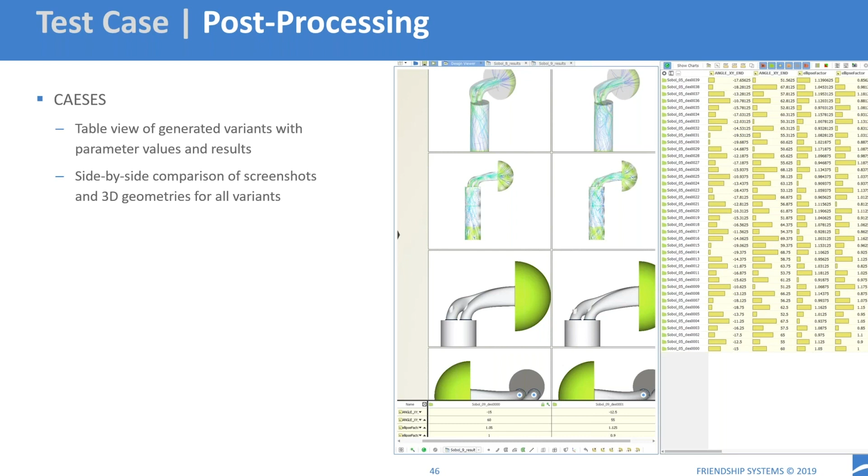You can compare screenshots that you have created in CAESES or externally, for example in Tecplot, as I mentioned before. You can also compare directly side by side the 3D geometries for all the variants, rotating them all simultaneously to look at the geometrical differences between them, really diving into your results and making some design decisions at the end.

So here, finally, just for the results, in this case as an example, to give you an idea of how the optimization process would look like, we started with an initial DOE to explore the design space. In this case we're using an internal DOE algorithm in CAESES, the so-called Sobol algorithm.

Then based on that DOE data, we ran a couple of following optimization runs. In this case we used a surrogate model that was created with the data from the DOE, and then refined with some subsequent CFD computations.

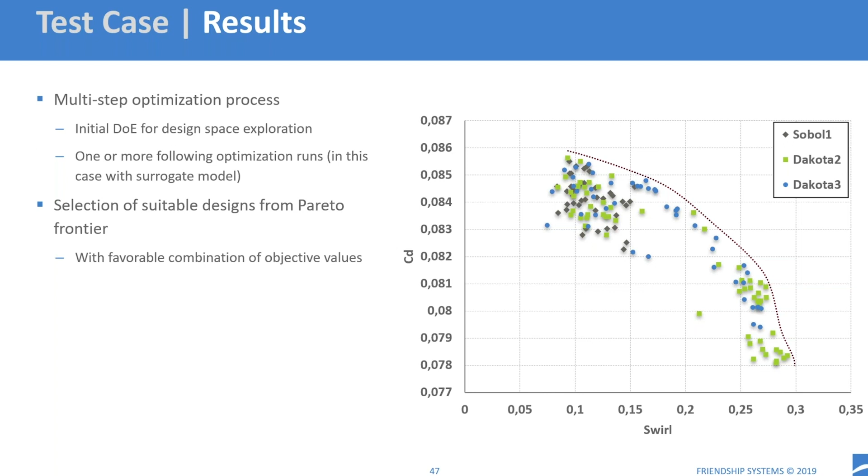Yeah, this was a view of the complete process. That's so much from my side.